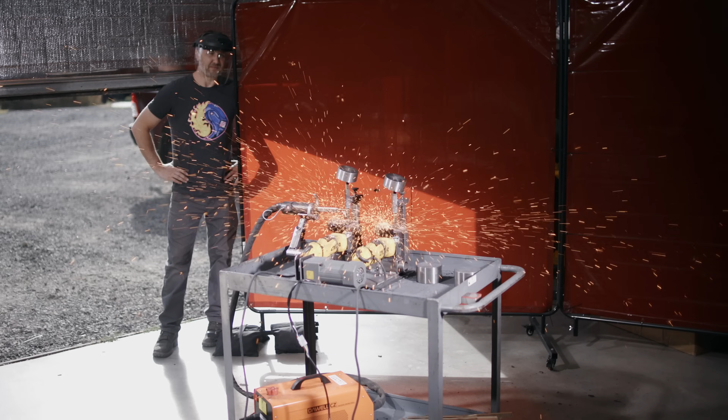This is my disc destroyer. It's a mean little machine with one job: testing grinding discs.

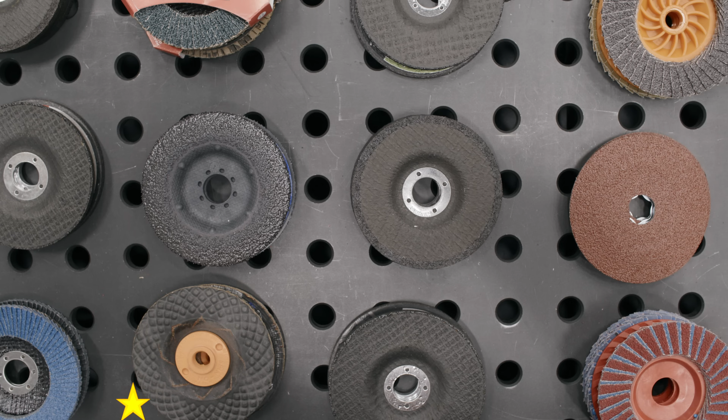With so many grinding discs and countless reviews, it's hard to separate fact from fiction. This is where the disc destroyer comes in. It cuts through the noise, delivering real results. No bias, no sponsorships, just cold hard tests.

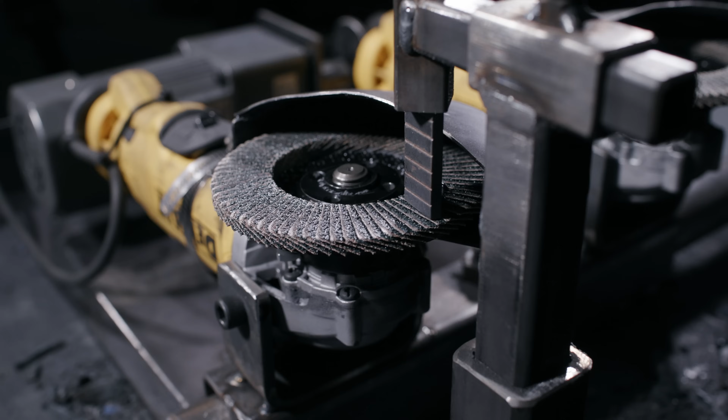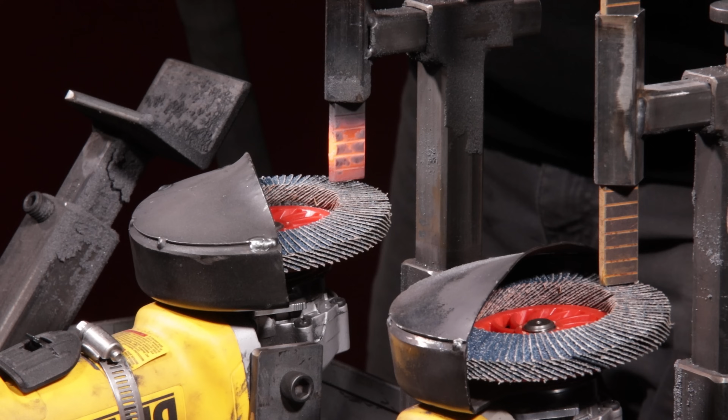Grinding discs can face a lot of real-world challenges, like high and low pressures, hot and cold materials, and of course, fast and slow speeds. This machine tests it all, so that we can finally find the truth in the reviews.

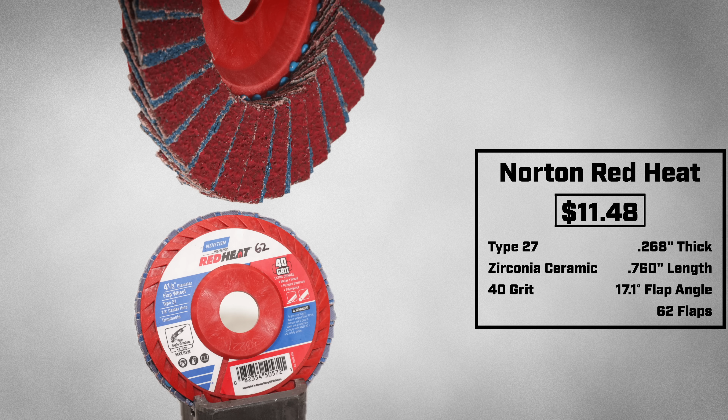Today I am testing the Norton Red Heat Type 27 flap disc, coming in at $11.48. This disc has mixed reviews, especially on how long it lasted. Some good reviews said it worked for them like a dream and didn't wear out. Another said that it saved them loads of time, and that means money.

Some negative reviews were that it will not last a few minutes with light use, and another said that it will burn out fast if you aren't careful. If it tears through wood fast, how's it gonna react with metal? This needs some more investigation. So let's test them to find out.

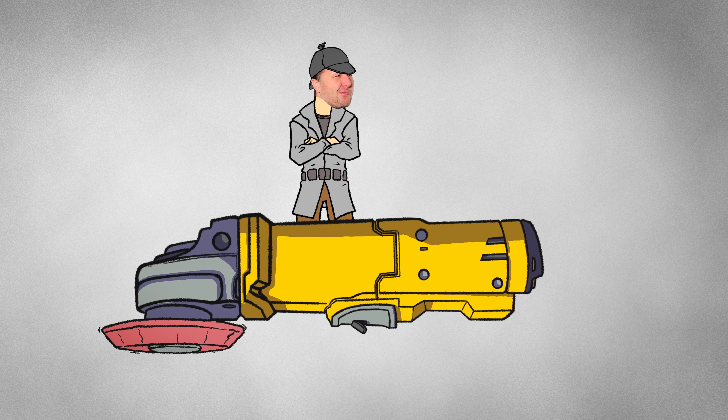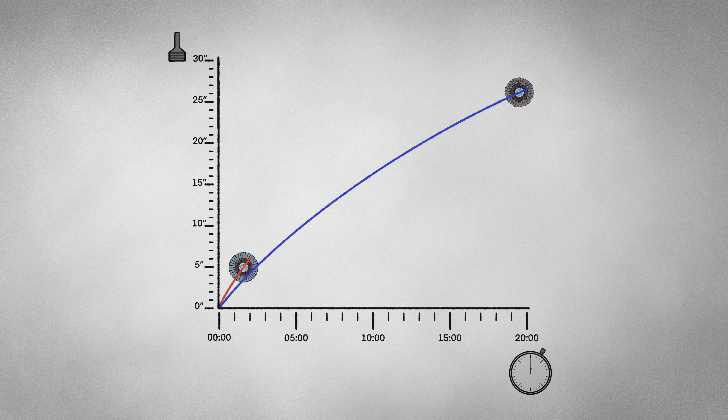Each disc will be grinding this test bar to see how much it can remove within 20 minutes time. This will chart out its story and tell us exactly how this disc behaves, based on how much material it removes at any given point. But if the disc stops effectively grinding the bar, or just straight up disintegrates, the test is over.

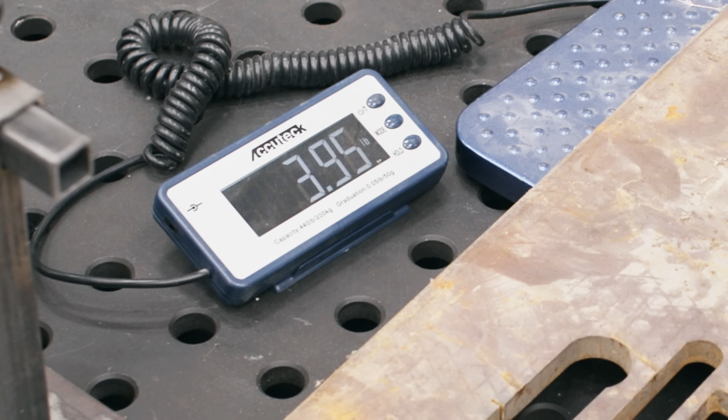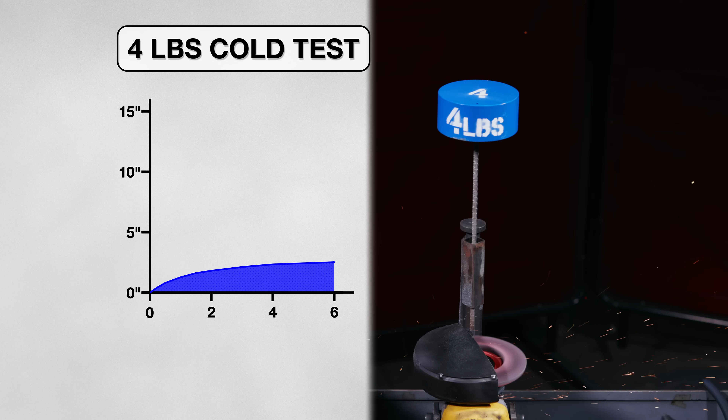Let's begin. I started by simulating light pressure grinding by using a 4-pound weight on my rig, which approximately matches the weight of a grinder. When the test started, it removed material at a slow rate, and it only ground off 2.5 inches of my test material until the spark stopped and amps dropped, telling me this disc wasn't grinding effectively anymore. This happened in just under 6 minutes. So far, these results are matching what the negative review said.

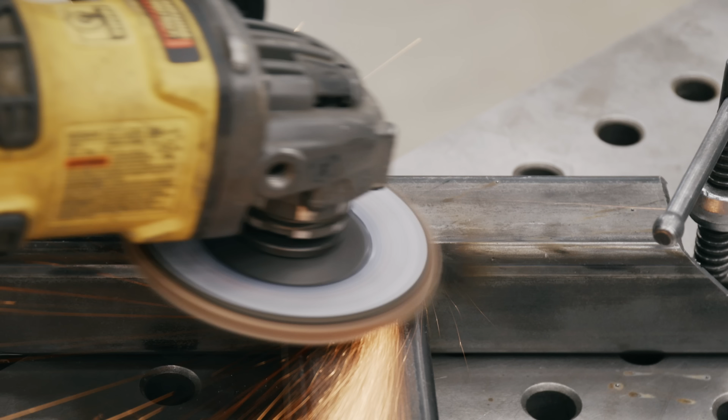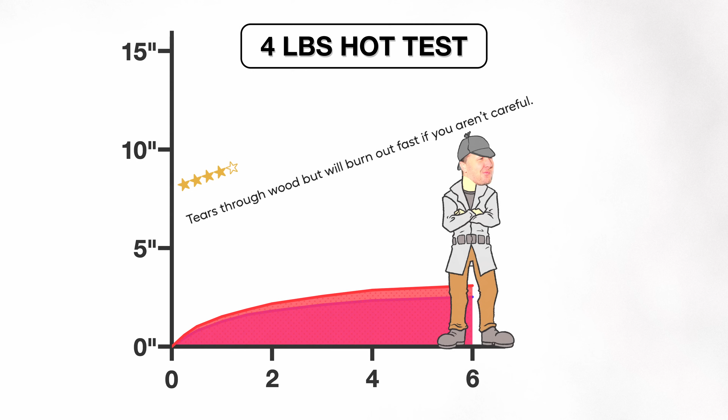So let's test the abrasive by heating up the test material and simulate grinding a hot weld. This disc performed slightly better, grinding off 3 inches of the coupon, but it still only lasted about 6 minutes again. So what's happening here? Looking at the disc, I can see that it glazed. The glaze can come from having not enough pressure on the disc, or the grinder's RPMs being too fast.

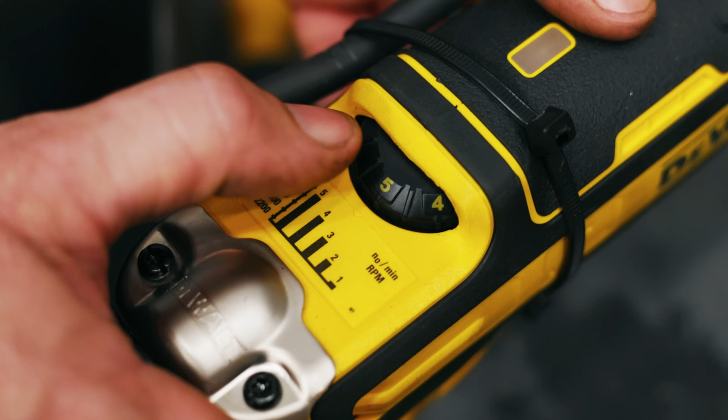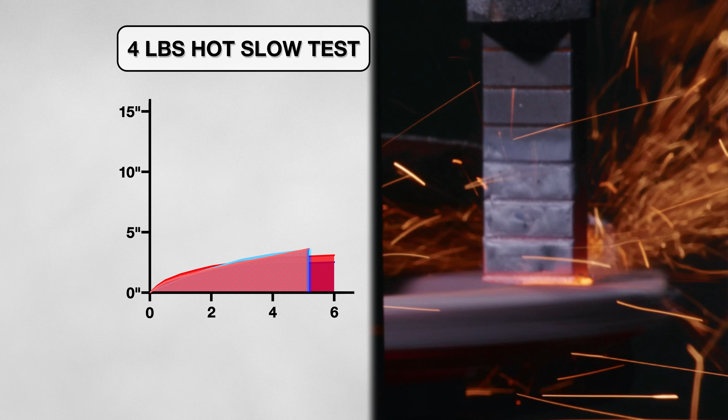So let's start by changing a variable, the RPM. I slowed down my grinder from 11,000 revolutions per minute to 6,000 and kept the 4-pound weight on. I ran these tests, both with cold material and with the preheated material, and they performed a little better than the faster grinder speeds, which we can see in the graph. So what is happening? Seeing them still glazing tells me that RPM isn't the issue.

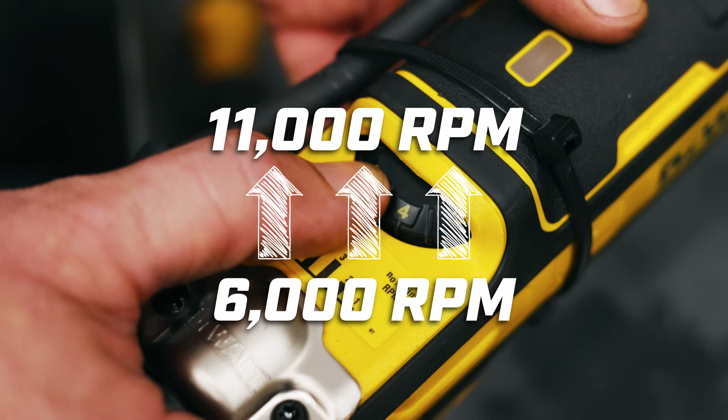So instead, let's increase the pressure. After turning my grinder back up to 11,000 revolutions per minute, I switched out the 4-pound weight for an 8-pound weight. Let's see if this changes the outcome.

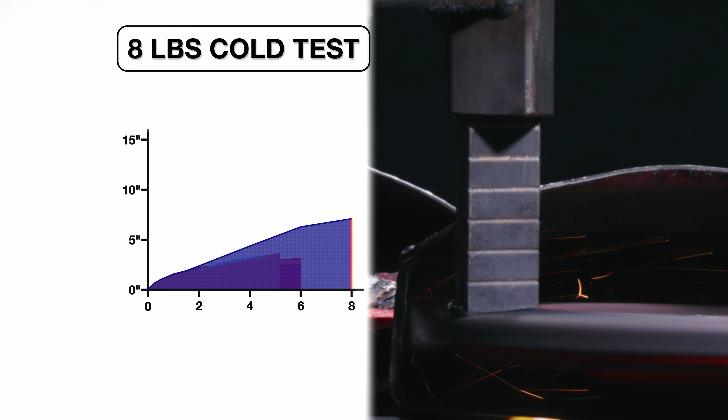When I started the cold test, I noticed it started off strong, cutting away material at a quick rate. But just before 8 minutes, this disc was not cutting away any more material. It had taken off 7 inches before it glazed again. But this time it was much more glazed than using 4 pounds of pressure. I mean, look at these two. This looks like it really did not last a few minutes.

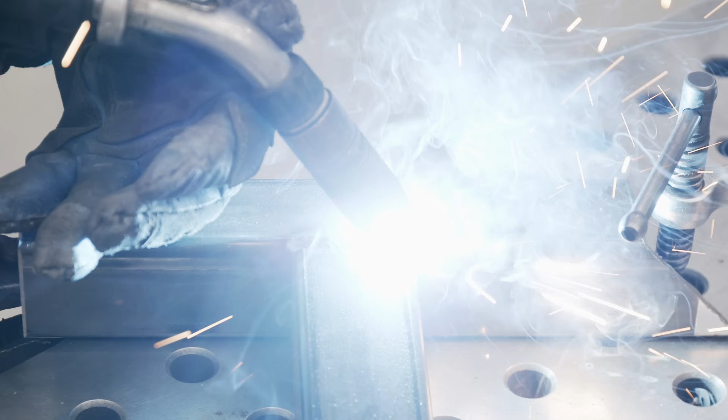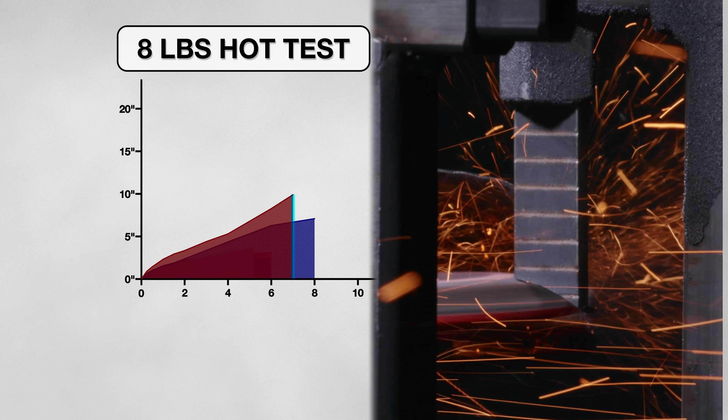Will the disc have the same results if we grind on hot metal? So I added the heat, and this disc started grinding and grinding and grinding, but only lasted 7 minutes. I had to stop this test because I began to see smoke. The Norton only ended up removing just under 10 inches of material. The outer edge of the flap disintegrated, and the test coupon was making contact with the plastic backing. Hot metal gave the Norton a jump start, but it had compromised the integrity of the flap disc, leading to a total failure at just 7 minutes.

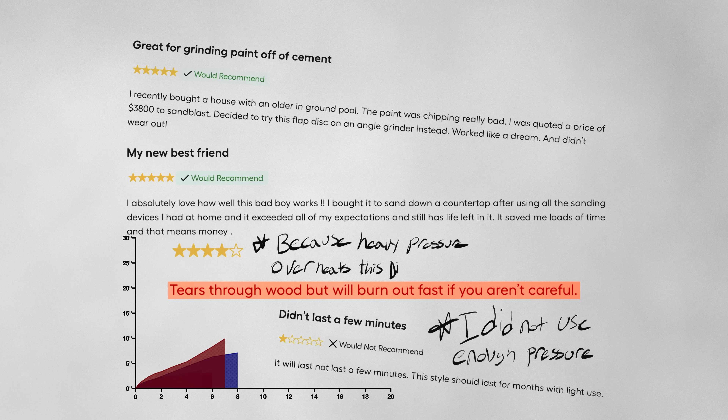Turns out metal is just as strong as wood with this disc, and will burn out fast if you're not careful. So these reviews clearly are not about grinding metal. Just take this guy's advice and still be careful, even if you're only sanding wood.